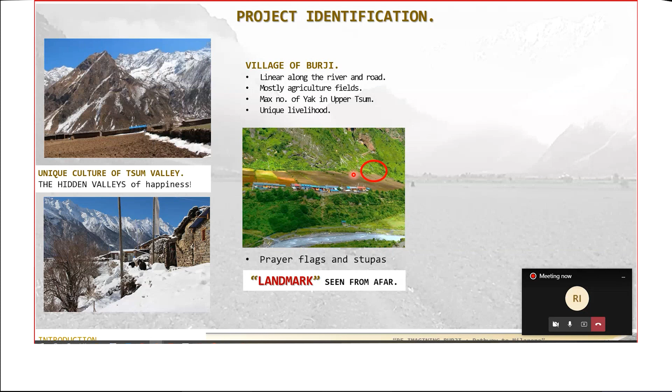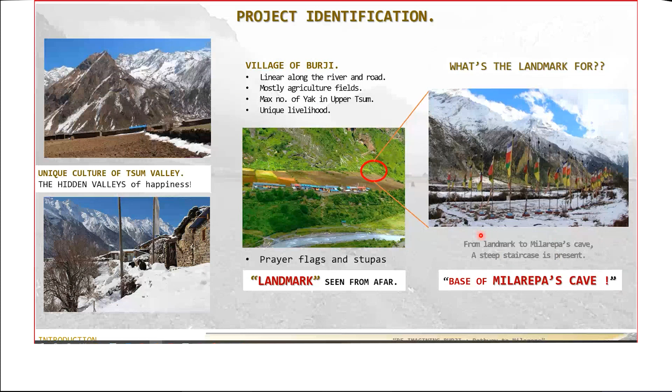And what is this landmark for? When we enter this village, we can see this landmark, and then there would be curiosity about what lies in this landmark. So this landmark is for the Milarepa's cave. A steep staircase is present from this landmark to the top of the Milarepa cave, and this landmark signifies the base of the Milarepa's cave.

So now, who is Milarepa? Milarepa is a murderer turned into a saint. He is a great Tibetan philosopher, and just like we worship Buddha, everyone in Tibet has this culture of worshipping Milarepa on a regular basis, as well as pilgrims from different places of the world come to this village in order to visit that cave.

Milarepa's cave in Burji is also visited regularly by the villagers, and this culturally and historically significant cave was my drive for this thesis. Now, from Burji to the landmark was my major concern. From Burji to the cave, we reach the landmark, and from the landmark we take the steep staircase to the cave. But the connection from Burji to the landmark was dotted, or wasn't properly addressed till today. So I took this as a problem.

The pathway from Burji to the landmark was the problem identified for my thesis, because to reach the landmark from Burji, we had to pass through the fields, and that would destroy the crops. The villagers had to compromise, and as travelers like us, even we had to go through inconveniences as well. So therefore, my thesis identified the pathway from Burji to the landmark as a problem.

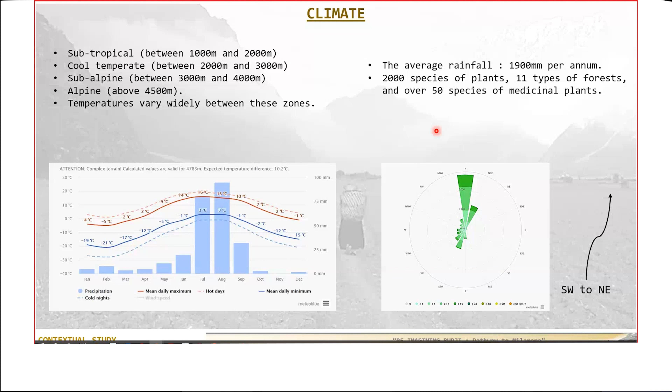So the climate is 1900 mm per annum average rainfall. So talking about the history, this place has a very strong essence of history and spiritual values in itself. It was first found in a 12th century Tibetan text, and during the Nepal-Tibet War, Tsum was taken over by Nepal, and it is known as the place where people ran away from the war in search of shelter. So therefore, it is also known as the Hidden Valley of Happiness.

One of the interesting histories of this very place is the non-violence history. In 1921, it was declared not to slaughter any living animals, not to hunt, and even harvesting honey was a crime in this very place. So therefore, this place holds a very significant relation with nature in itself, and this was further explained in my thesis.

So livelihood of people highly depends on agriculture, that is when there are no heavy snowfalls. And the festivals, they have this unique horse riding festival that happens every year, and this mask dance that is very unique and very similar to the Tibetan culture. The people here speak their own unique language and wear their own unique dresses. They have their own unique way of life that is different from anywhere in the lower portions of Nepal, and they are known as the Tsumbas since they live in Tsum.

So architecture of Tsum, starting from settlement pattern, they are alongside the rivers. Most of the settlement patterns are clustered since it's a very cold region, except for the village that I chose, that is Burji. It is linearly placed alongside the road and alongside the river.

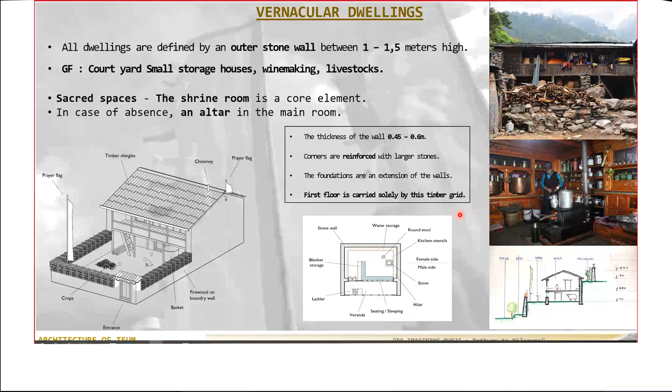We can see typical houses with stone as the material used, and the ground floor is usually used for animals, whereas living spaces are in the upper story. Similarly, in the kitchen portion, we have the male portion and female portion separated, and the thickness of the wall, and they have dry stone masonry as well. And the shrine room, the sacred space of their houses, is located on the first floor. Materials used are stone and wood, unless it's a gompa or a building of religious value, then we can see metals being used.

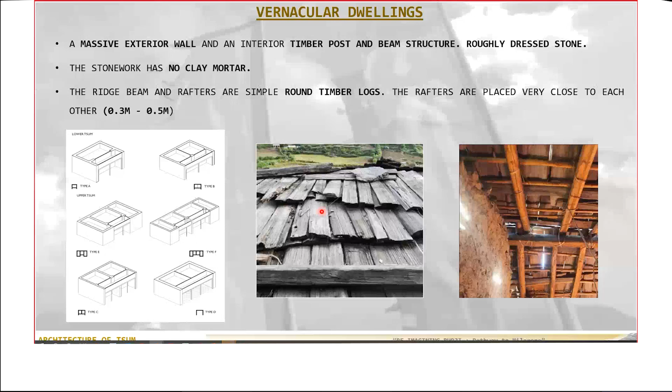Openings had the sequence of 3 and 5, and highly Tibetan influenced architecture could be seen, and other elements from Tibet. So these are the materials used. And this is the typical axonometric explosion of how the structures have been planned, and how the upper floor is completely made out of wood, and stones are rarely used, just to envelop the building.

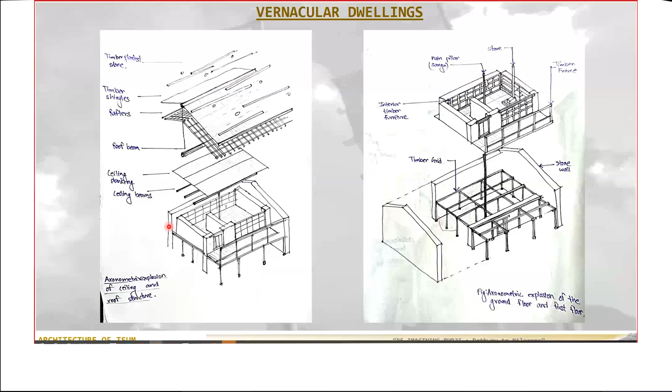So talking about Burji Gaon, that is the village that I chose. So Burji means a blessed land. It only has 14 households, though it has the highest number of yaks present in Upper Tsum, that is 135. It lies at the lap of Milarepa cave, and it is also at the center of Upper Tsum. These are the reasons why I chose this village, and the distance from Mu Gompa, the ultimate destination where all the yaks are reared, is 2 hours.

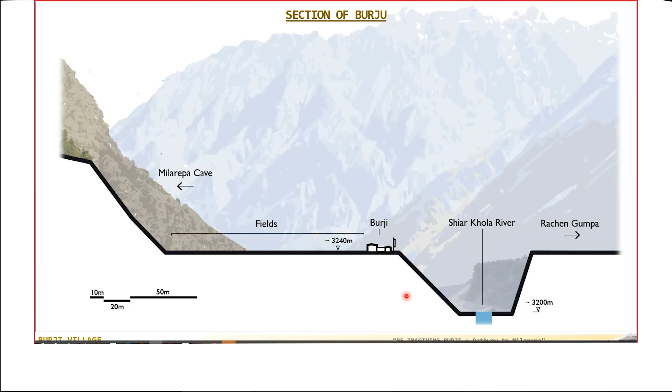And I documented this since it's a very small 14-house village. I could document this village, and these are some of the vocabularies in their local language, like they call yard ilto and all that. So I was able to document it. So these are the 14 houses.

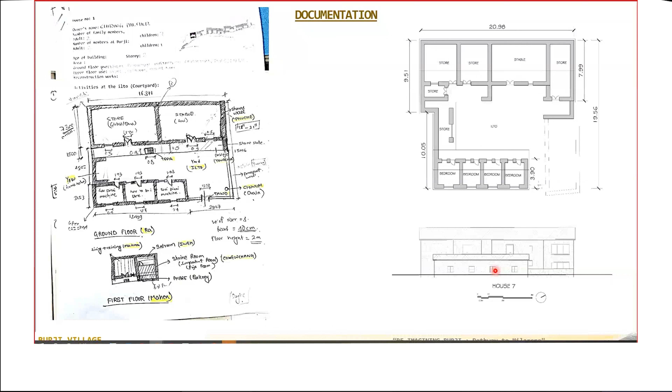We could see they have this common courtyard, and after the earthquake in 2015, we could see newer buildings, banded houses that were made under the government proposed clauses as well. So the banded houses held new activities that were very important to them. So that helped me study their social aspects further.

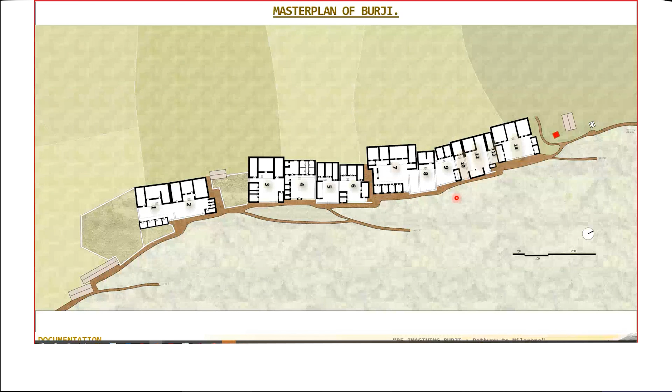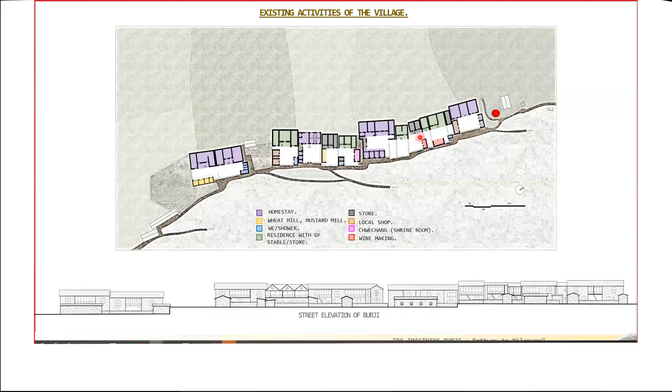Like this house was completely developed to produce wheat and mustard, and these houses were developed as chwechang, that is the shrine room. Any visitors would be able to experience the activities along the pathway, but then there will be enough privacy for the people as well, since they all reside in the upper story.

And at this endpoint, we can see this red mark is a bhumpa. This bhumpa is relatively unnoticed and uncared for, but the villagers worship it every day. So this bhumpa was taken as a departure point of my thesis. And like discussed earlier, I had formulated my programs after interviewing the locals there. So these are my proposed activities of the village after interventions.

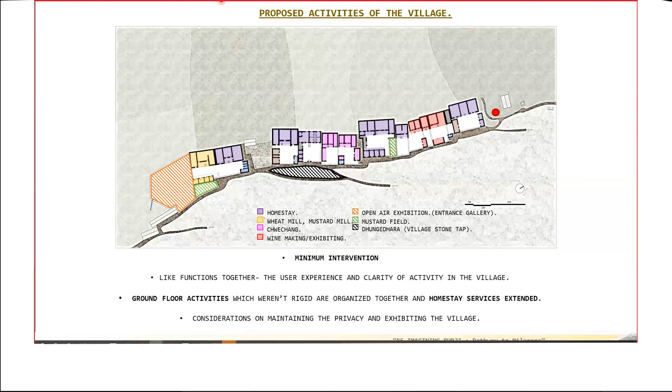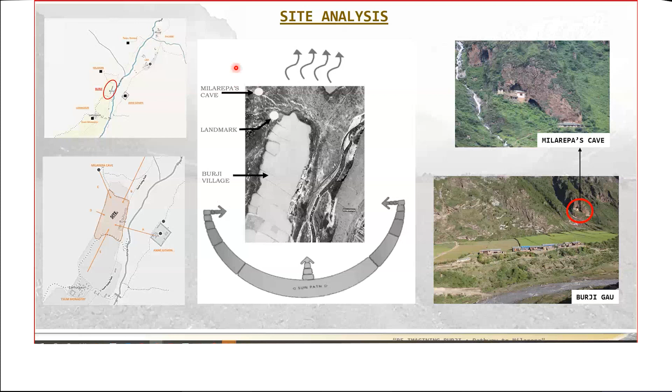So some of the sketches aside, it helped me get an insight into the village, like these gyakdungs over stone walls. So talking about the site, my entire village was taken as a site. This is the village, and this is the landmark, so my major proposal was to connect these two areas, and this is Milarepa's cave. So this is the cave, and here is the landmark.

So my concept would be hidden links, unfolding the relations. Why did I choose hidden links? This valley is known as the hidden lands of happiness, and also there are so many connections with animals, with people and their history, that all these connections and relations had to be opened and more glorified. So I took 3 major points, that is spirituality, economy, and nature.

Spirituality, I will go further into later on. The other would be a window to Tsum. This project would act as a touristic destination where a user would experience what Tsum Valley was all about, and not just Burji village. And similarly, since major points can be seen from this very point, it would be a window to Tsum.

So further elaborating on spirituality, economy, and nature, oftentimes we forget about the spiritual aspects of life. These 3 points are the major aspects that we as humans live by. So talking about spirituality, first would be samsara to nirvana, that is the world that we live in, to the enlightenment phase. So the pathway will act as a narrator of Milarepa's journey to freedom.

So Milarepa's journey as a normal man, a murderer who turned into a saint, towards his enlightenment will be a connection of spirituality from the world to enlightenment. This hidden relation is to be unfolded by architecture, done physically by connecting Burji village and the landmark itself. Next would be economic aspects, that is economic ties to freedom.

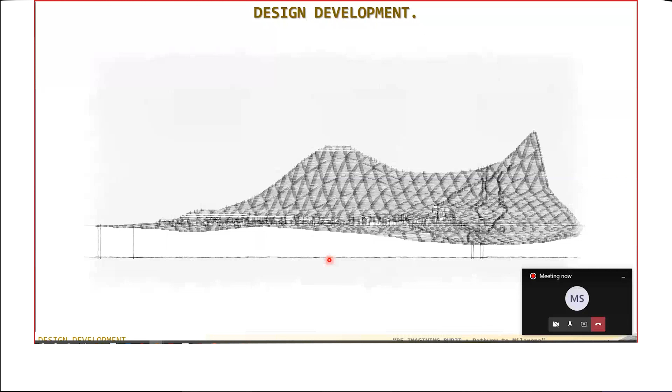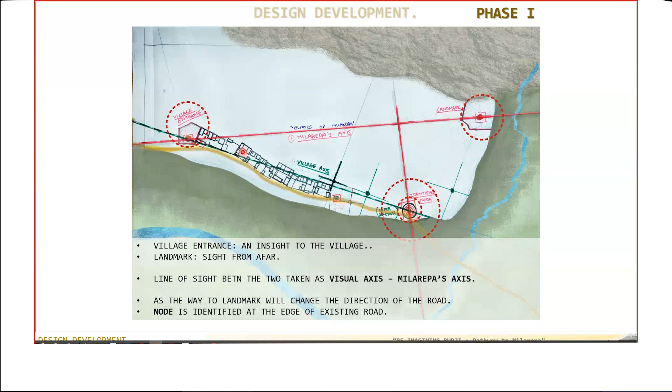So the axis from the node and the village to the landmark was taken as a visual axis, and the node was identified at the edge of this existing road, so that there will be no disturbance to what was already there. And in phase 2, the node would divide my programs into two halves, one half on the left and the other half on the other side. And the pathway to the landmark was developed along the cliff line. Other options were tried as well, but the best and most efficient was the pathway along this cliff line, since all this agricultural land would then be preserved.

And this gompa that I explained, how it was unnoticed, was taken as a departure point for my further development. And now the green axis, we can see, is the village axis that was taken. This will further guide all the other new buildings that will be intervened in this village. So taking the gompa as a departure point, the first bit was done, and we can see these three red rectangles placed alongside this visual axis, and these are the open spaces. Now for the building structures, this green axis and this red axis will come into play.

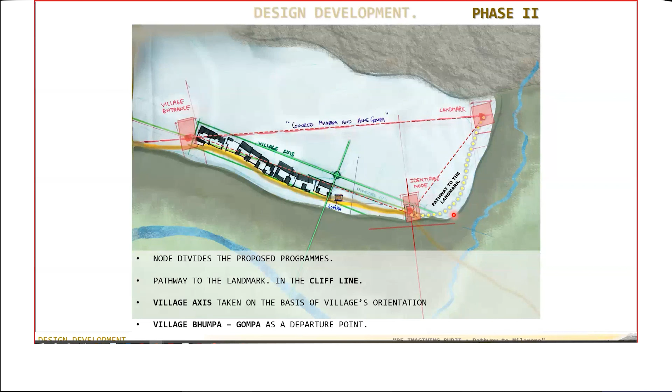Phase 3 would be developing the clusters. So I have 4 clusters, that is A, B, C, and D. A is the library and village hall, placed close to this village, that will cater for this village only. Then comes the wool weaving and sewing exhibition block. I chose it because they have this communal sewing culture. That is, if I sew a carpet at a neighbor's house today, tomorrow they would come to my place for the very same activity. And for bringing women together, this is the place that would exhibit as well as sell, and generate some economic revenue as well.

And C would be the cheese house, and D being the pathway that will be developed as Milarepa's gallery itself. This pathway is inspired by the mani wall that announces the welcome. A similar mani wall can be seen at the entrance of the village.

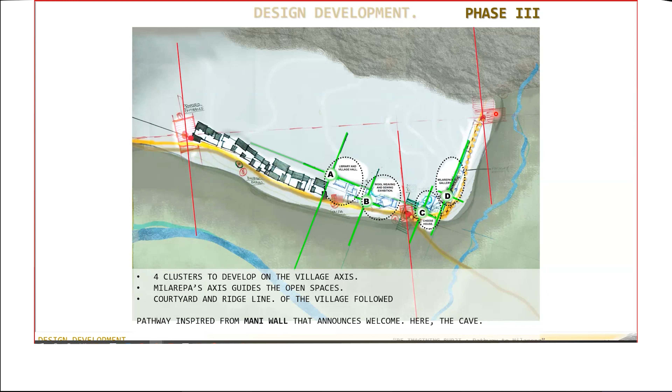So this is replicated in order to announce again this landmark itself. So the courtyard and the ridge lines of these villages were taken as a reference for the further cluster development. So the zoning begins from this cluster A, that is the Bhumpa Square. This is the very stupa that I wanted to address. A square was built around it where the community could gather and have small communal activities within this very village.

There's a library and village hall placed alongside this very village, and block B would be the sewing block. The entire block placement was done in accordance to the vernacular architecture of that very place. The narrow alleys were also provided. These are the two courtyards: this is the wool weaving and this is the sewing courtyard, and this is the very node that was identified, which also acts as a window to the tomb. And this is the cheese block, and these are the Milarepa gallery.

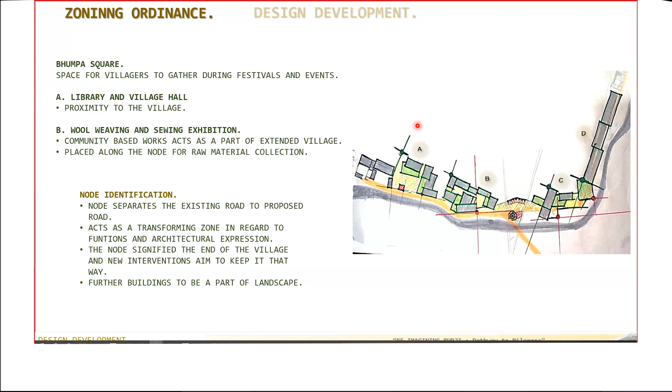This is the very beginning phase of my design development. So any building after this node would be sunken into the ground so that it wouldn't affect the agricultural land and the landscape of this very place. But these two blocks, A and B, would be an extended part of this village itself.

So talking about the cheese house, this node, how does it act as a window to the tomb? From this very point, we could see the wool weaving at the left, cheese house at the right, and towards the north, we could see the landmark, the agriculture field, the mountains, and towards the south, we could see the river. Therefore, this very point would give an overall experience of this village itself. So this acts as a window, and my aim would be to demark this landmark such that it holds its importance further.

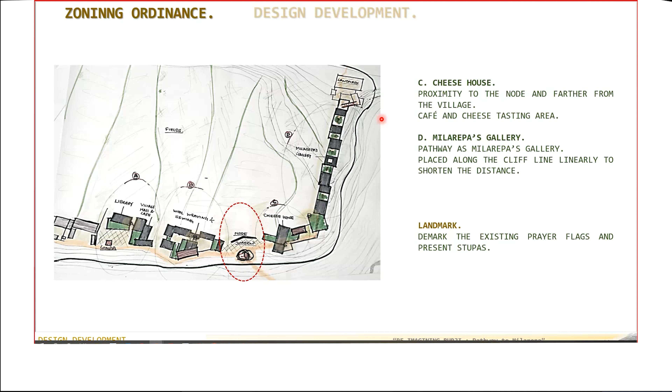This pink is the existing village. These yellows are the footprints that I have further developed. This is the node. Although these are the footprints, these buildings are rather sunk inside the ground itself, so these don't appear later on. And this is the actual pathway from the village up to the landmark itself. So talking about the entrance of the village, this acts as an open air theater and acts as a welcoming point for all.

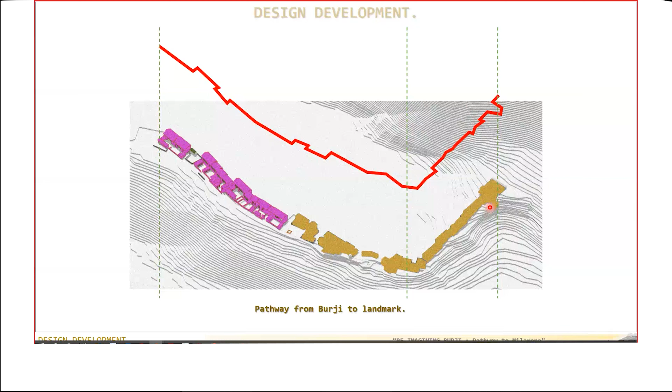While studying all the villages around, I came to the conclusion that every village had a stone tap except for this one. So a village tap was proposed at the center point where trekkers could rest, and then there were horses. Since there is no other means of transportation, every household holds horses. Therefore, this becomes a space for horses to drink water and bathe.

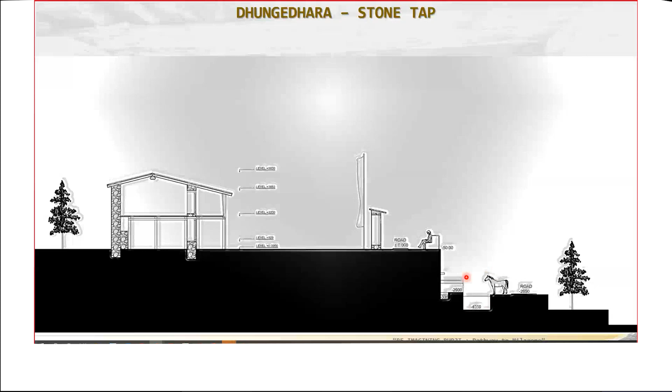So moving on to the Bhumpa Square, this is the Bhumpa, and this is the square that I have designed. This becomes the platform for people to stay and acts as a small amphitheater for this very village. And this is the village hall and cafeteria that caters to the village hall itself. So this is a section of the library. In the section we can see I have placed a wall of prayer wheels, so that this gives out an angle or the axis for my further building placements.

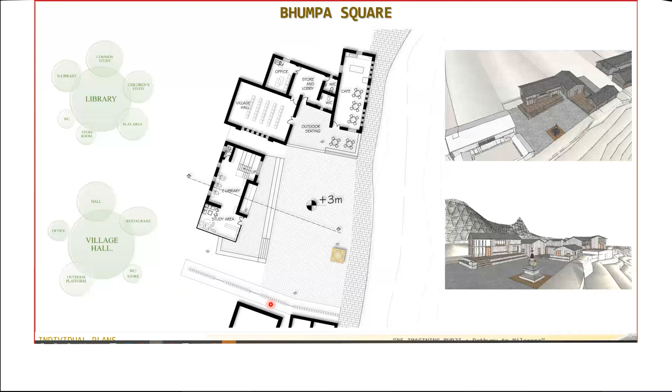And these are the windows. These windows are replicated from this existing village, so that it gives an expression of how the village has been since long time back. Next would be the weaving and sewing block. This is the plan for the weaving and sewing block. It has two courtyards in it, and as we can see, from 4 meter to 6 meter the road level rises. I have given this courtyard. Also from this courtyard we will be elevating from 0 to 1 and then 1 to 2.

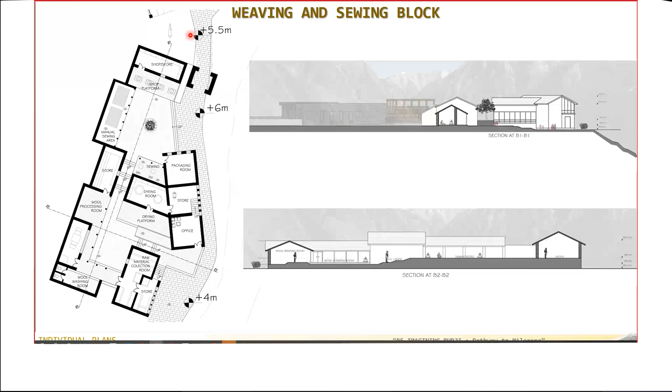So these are the narrow alleys that were created, and these are where the raw materials will be collected, and wool washing rooms, and then the wools will be processed here, whereas the sewing programs will be done in this very courtyard, and we enjoy all the activities on our walk on the courtyard. But the activities will not be disturbed as they are separated on different platforms. So here is a small shop as we exit this very block, and here I have placed an entrance as well, from where we reach the node of this very village. So further explaining, this is the cheese house.

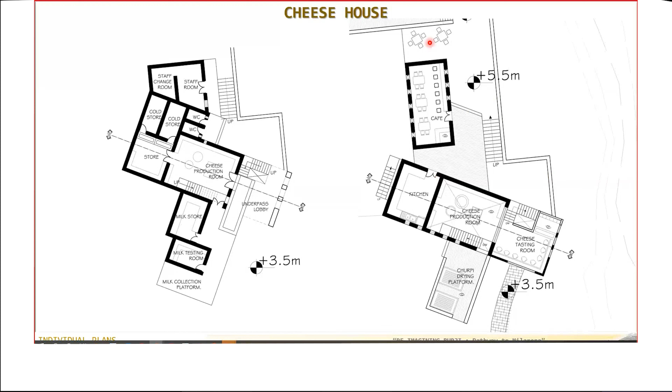For the cheese house, I have developed an underpass lobby. These portions are all underground, and this is the upper level portion where we can go towards the cheese tasting room, and we can enjoy how the cheese is produced through this double story height of the cheese production room, and then the churpi drying platforms are also given. Further on towards the Milarepa gallery, we can see a cafeteria and a resting space.

So this is the cheese production room, and this is the cheese tasting area. This becomes the underpass from where we reach the Milarepa gallery's entrance portion. So these are the different levels in which the cheese production room is established. This underpass is also influenced by the traditional architecture of this place, that is Kani, that whenever we enter a home, we need to bow down a little bit. So this underpass was created from that very concept as well.

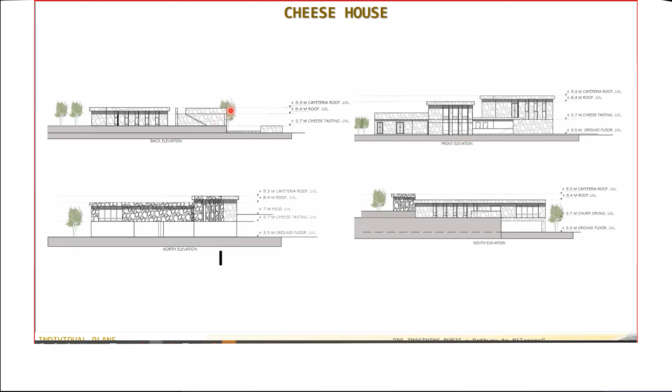So we can see the staircase. We reach the upper roof level, the flat roof that allows farmers to dry their crops as well, and a resting space. So this is the cheese block. This is the underpass that I was talking about. This is the churpi drying room, and this is the node, a window to chum. This is a resting space. From here we could experience the entire Milarepa's gallery that acts as a landscape in itself.

So the next would be the Milarepa's gallery. Before explaining Milarepa's gallery, I would like to give you an insight into Milarepa's life story that I have divided into 7 parts. Milarepa is a Tibetan philosopher who is worshipped by the Tibetans, and the Milarepa story begins with honesty and betrayal from his uncle because of financial issues, and then his search for tantric wisdom. After the search for tantric wisdom, he had this vengeance, and he avenged the entire village by killing more than 100 people and by causing a thunderstorm.

And then there was a remorse phase of his life for what he did, and then comes the enlightenment phase and preaching and traveling. During this preaching and traveling he came across this Burji village, and he meditated in that very cave, and it is believed that he left his footprints in that cave. So that is the reason why this cave is so significant, and people from all around the world travel to this place every year.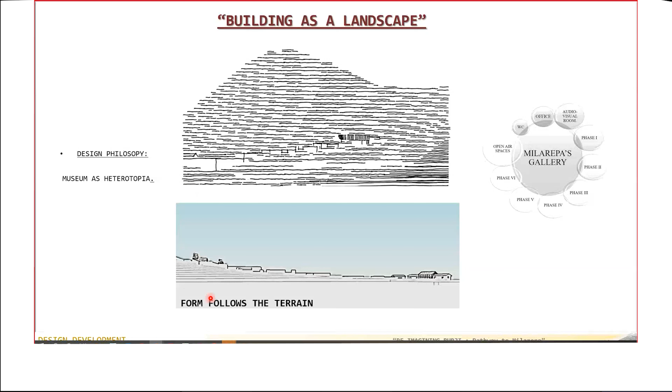So the main design philosophy would be museum as a heterotopia, such that we do not need any object to be in a museum. A museum could speak for itself. Therefore, building as a landscape was addressed: the building follows the terrain so that it creates harmony with the landscape it stands on. And pathway as a storyteller: the 6 different phases of Milarepa's life are to be told by this very building. Since we have to elevate in height, a straight pathway would be the shortest distance from the village to the landmark. So I chose a straight linear building, but to narrate his story, the design was started at the sectional level.

So these are many sketches that I experimented with, and these are some masses and voids that I wanted to balance out. Since it's a very long pathway, we need a lot of resting space, and as we say, only when your eyes rest can the mind contemplate. So taking that, I broke these masses with lots of voids and created courtyards immediately after elevating a few heights. So this museum was proposed to be a storyteller of the great Saint Milarepa himself.

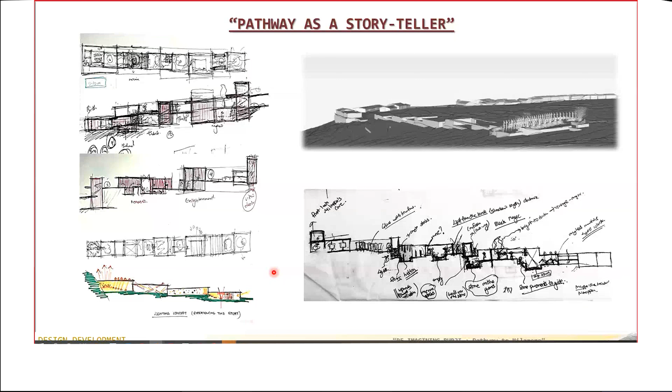Another concept would be the lighting concept, the lights through which you could evoke emotions in a person. A museum doesn't necessarily need any elements to be exhibited. So this pathway itself exhibits as a narration, and the user would experience his entire life story. Attempts were made to do so. So this is the final product of the gallery. This is the entrance portion where we can see audio visual rooms, and this is how I broke the mass and void in this very long building.

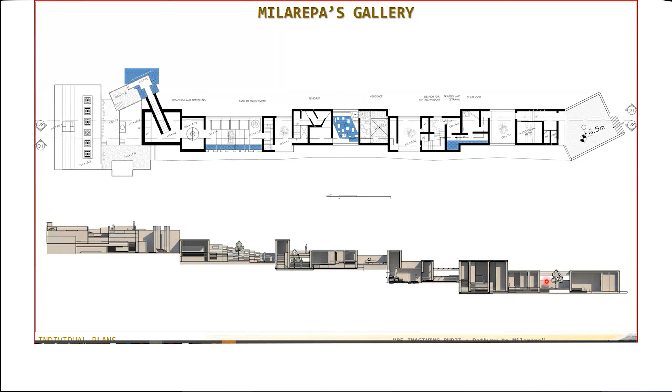So this is the study of light and shade. I will further elaborate this in further slides. So these are the lights and shades of this very building. So form development, as I've discussed earlier, the Mani wall was taken as an inspiration that announces the welcome towards any place, and then these monotonous blocks were then broken into voids and then further developed in this way.

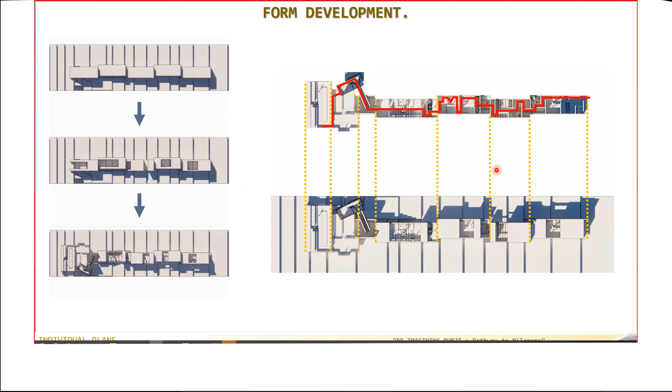I have placed my physical model at the right hand corner of this screen so that we can see the entrance lightings were slit lightings, so that it would create interesting light effects on the stone wall itself. And this is the audio visual room to give an insight into who Milarepa is before beginning a journey from this very point.

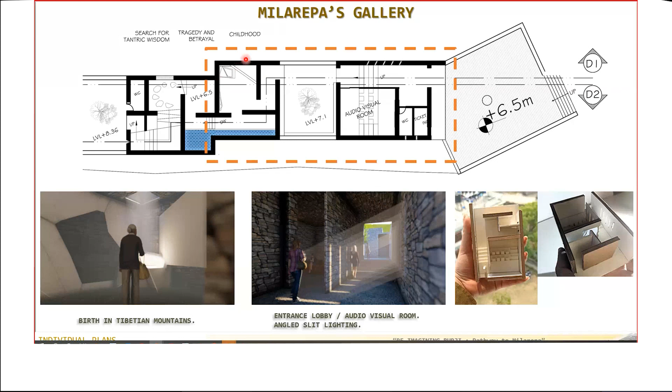And after an insight, we come out to this open space, and then this first portion would be the entrance. This is the childhood, that is the birth in the Tibetan mountains. The walls were placed in this way so that it could control the amount of light entering the building. So the only light in this portion would be from the top, and then the inscripted wall would come into action, so that people would instantly get their eyes on this very place.

And similarly, after his birth and lavish childhood, there was this tragedy and betrayal stage of his life that was denoted by this flowing water to the stagnant water. And this is a dark room that expresses his betrayal in life. And then we can see the stairs elevating upwards. This staircase then takes him to this light, takes him out to the open again. That is the search for tantric wisdom.

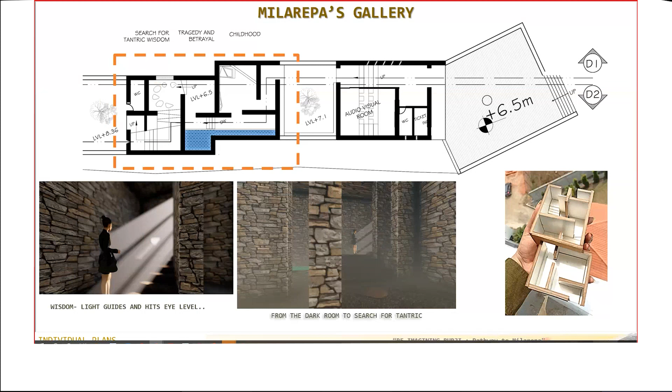And this is the very staircase. We can see the light hitting directly on the person standing at this very point. So there is another slit lighting that will hit directly as we walk from this dark room towards the open space. We first experience the light hit across our body, and then we walk towards the light, to this open space again. We can see in this model as well. This is the pathway that we can walk.

And the next stage, after he achieved tantric wisdom, would be this stage of vengeance towards the entire village, when he killed more than 100 villagers and caused hailstorm and landslide to that very village. So to express that very emotion, I took inspiration from the Jewish Museum, where we can hear clinking sounds to express the emotions of Jews and how they were tortured. So similarly, I have used the stones to make it difficult for the users to walk through it, so that they get an essence of the struggles of the survivors.

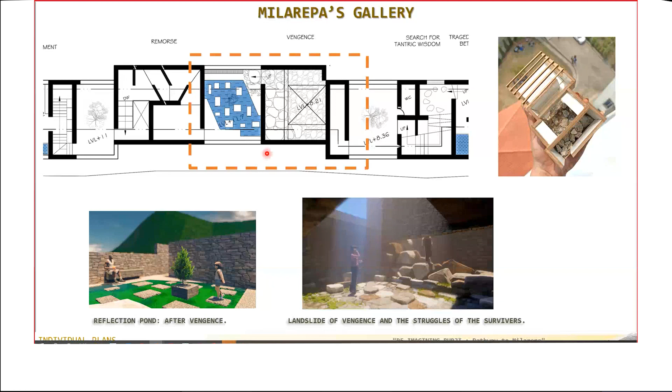So this is how they walk from this open space to elevate up. And after this vengeance stage, there comes his remorse stage. Before that, we come across the water body that acts as a reflection pond after his vengeance on what he just did. So this acts as a reflective space in itself. And then we go towards the remorse stage. This remorse stage of his life is the longest stage, and here we can see this.

This is the dark room, and they have to go through, and there's slit lighting again. The lightings occur in the opposite direction as well. So after this remorse stage, it goes downwards, and after this we come out into this courtyard. This is the very courtyard I'm talking about, and this courtyard is a double story courtyard.

We can see in this model that this is the courtyard we come out to, but this upper portion is accessed through this staircase again, and this point will be a look back point to his journey after his vengeance, after his reflection on what he did, and then the remorse phase. He will finally go towards the enlightenment phase, after a long duration of the remorse stage in his life.

His life journey is directed towards the enlightenment phase, and this is the enlightenment staircase. But then we have this doorway towards the left, but the staircase continues.

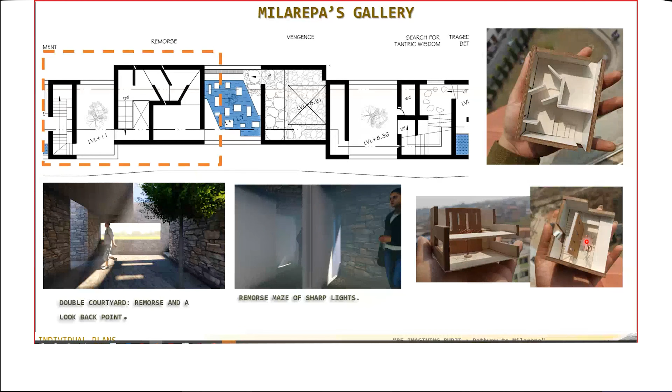This continuous staircase takes us towards this upper story, that is the look back point for his entire journey. And now this is enlightenment. This is the enlightenment staircase. We can see from here we get to go out, but then the staircase continues for anyone who wants to stand out of this space and look back to the journey. So from here we go towards this enlightenment courtyard.

The enlightenment courtyard is filled with his journeys and his teachers, the translator Marpa that he worshipped. So this place is designed as an inspiration from the Vietnam Veterans Memorial. The way the users are reflected back, similar ideas are used in it, and the pathway isn't even straight because there is this sitting space and tree space, plus you have to go this way to access towards the end. So this is the enlightenment courtyard, and there are 8-fold paths of enlightenment expressed through this waterfall, and these eight openings that view towards the village itself.

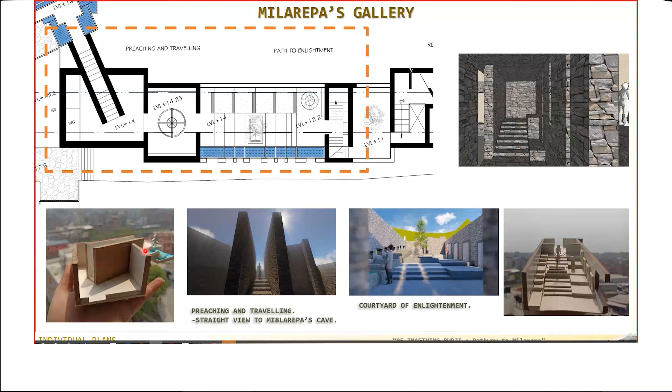And then comes the prayer wheel room, and then we come towards the end of this point, and we see the steep staircase that is angled in this direction. Now this angle is the visual axis that I mentioned earlier, the red axis. All these buildings are in the green axis, that is the village axis, but this is the red axis. Why is this wall so tall, and why are we completely covered and directed in a very straight direction? It is so we get the look of the Milarepa cave directly from this point. We do not reach the Milarepa cave, but the first visual point would be looking at the cave because of these huge walls.

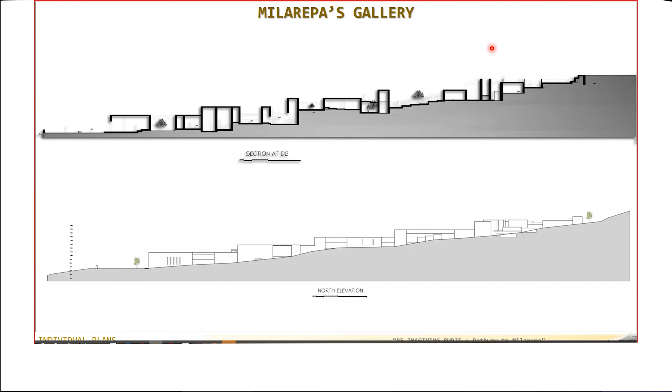So this is the overall section of the gallery. We can see this is the audiovisual room, and then the open courtyard comes in. His birth, his way to tantric wisdom, and then his vengeance point. Then again the open courtyard. This is the double courtyard portion, and then this is the enlightenment point. This is his enlightenment courtyard, and this becomes the prayer wheel, and this becomes the pathway. So this is the landmark in itself.

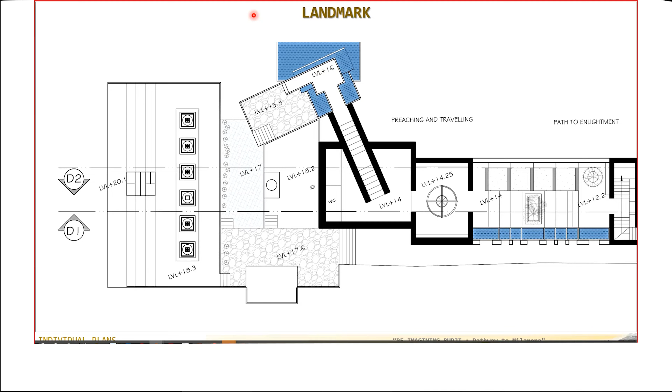And talking about the landmark, as I had mentioned earlier, the visual axis, there are 4 different points that were addressed in this very landmark. 1, 2, 3, and 4. These are the 4 platforms that point towards the 4 culturally and historically significant places of Burji village. And this water goes out to meet the immediate natural waterfall at this very cliff line. So this is the view from the landmark, and this is Milarepa's statue, and this becomes the pathway again. This is the stupa, the existing stupas at the landmark. So this is another view from this.

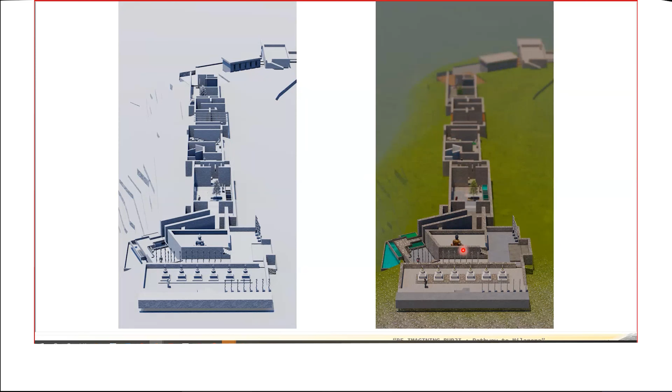This shows the overall horizontal circulation of this very building block, and how it is sunken inside the ground, and the roofing hasn't been placed to show the interior walls of this very building. So these are some of my model placements, and these are some other renders. These are 3D visualizing models at the initial phase. So this is my very first model. This shows the entrance point. These brown are the existing villages, and these white are the proposed villages. So this is Milarepa's gallery, the long one, and this becomes the node.

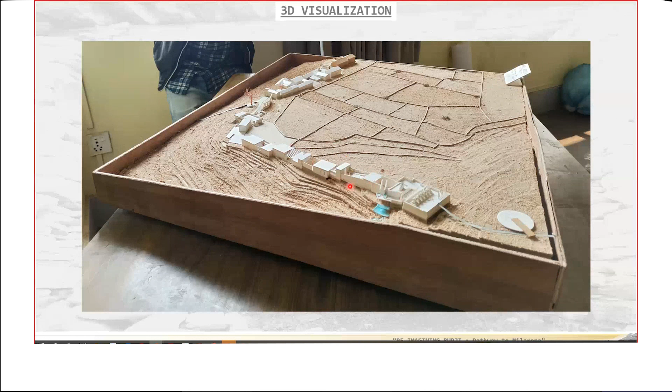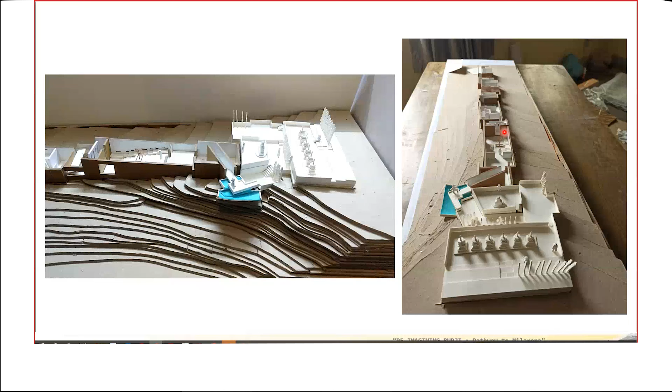And this is my other model. This model shows with clarity how this long building has been chamfered and cut down into mass and void in itself. And this is the reimagined landmark. So these are the sieving blocks, and this is the Bumba Square. And this is the final model that was done in 1:100 scale for the open circulation of this very long building.